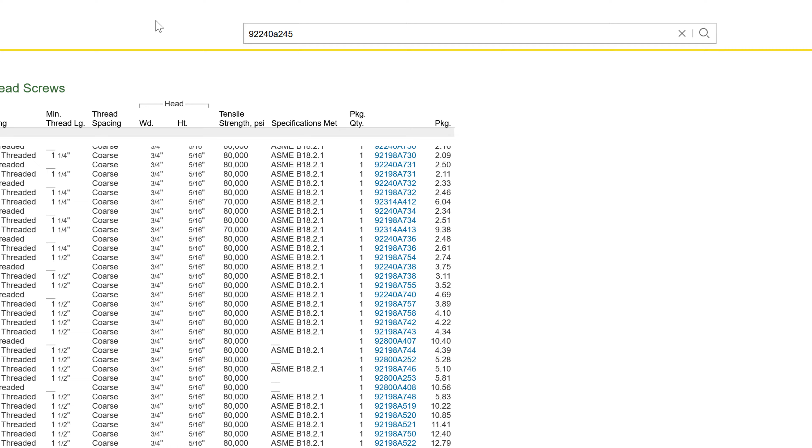I'll go with part number 92240A245. And here it finds us our bolt, so I'll go to this product detail here. And of course it gives us a lot of specifications about the bolt. We can drop down and see the formats that we can bring in. We have IGES, 3D PDF, SAT, SOLIDWORKS, and STEP with no threads.

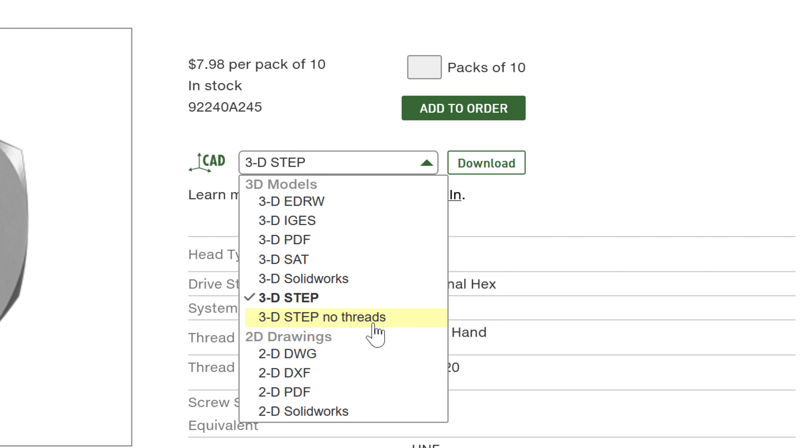We can import actually the IGES, SAT, SOLIDWORKS, and STEP with no threads all into Alibre. And I actually think SAT is probably the best choice in most cases, even though STEP will be the most common. Let's give an SAT file a try on this one, so I'll click Download.

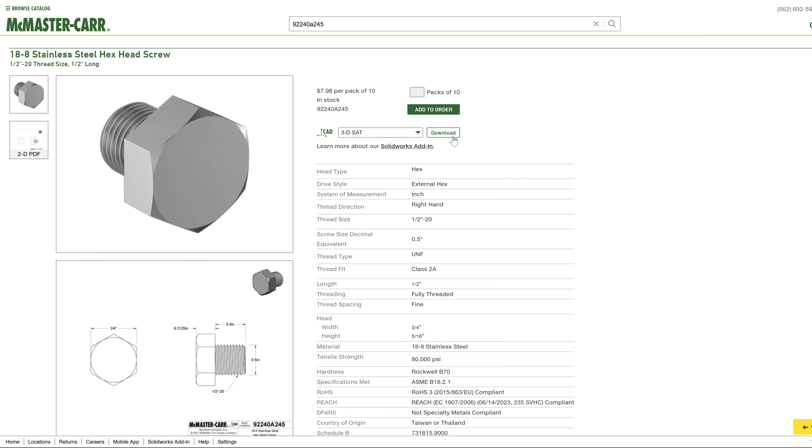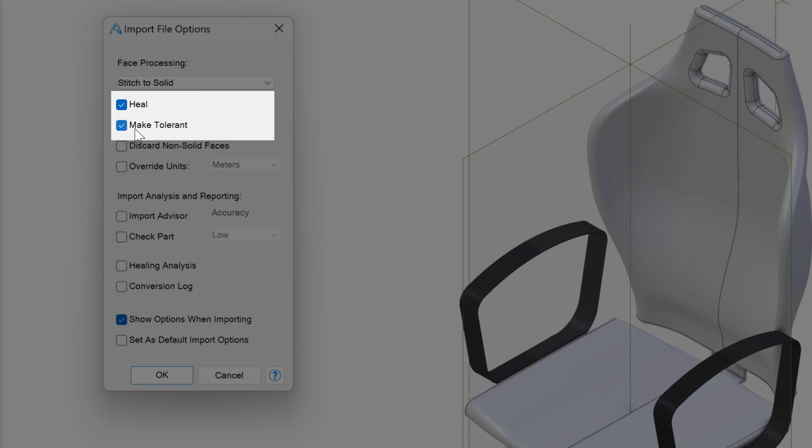So returning to my office chair model, I want to import the design that I just downloaded. So I'm going to click on Insert Design, and I can select the model that I have just saved. When we do, an Import File Options menu comes up. I always recommend Stitch to Solid and Heal and Make Tolerant as best practices for importing other formats. This is again in the SAT format. So with these two options selected, I will click OK.

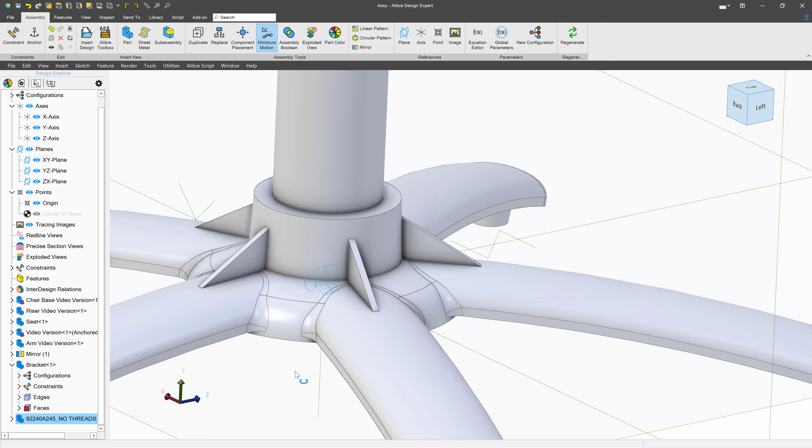And here, if I highlight in my tree, I can see that the part was imported right on the origin and is currently sitting right in the middle of my part. So what I'll do is I'll choose Component Placement right here. I'll go with Precise Placement, and I want to move it down the y-axis, say distance of 10, and I'll go to Selected Components and choose my bolt, and we'll apply that. So now we're able to move it out of the way, and that's our bolt.

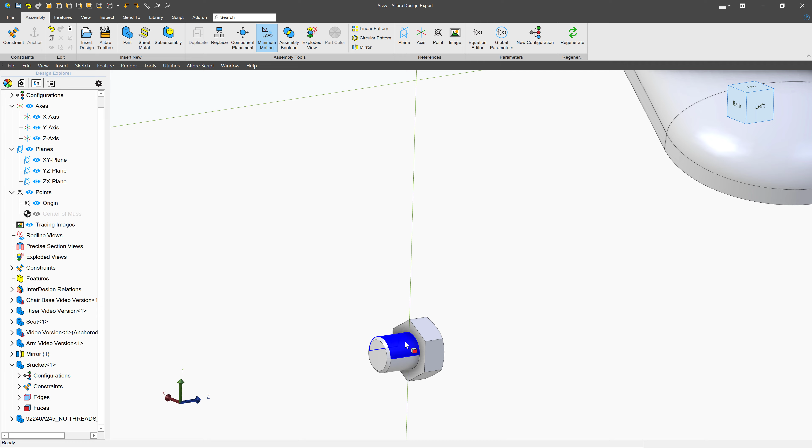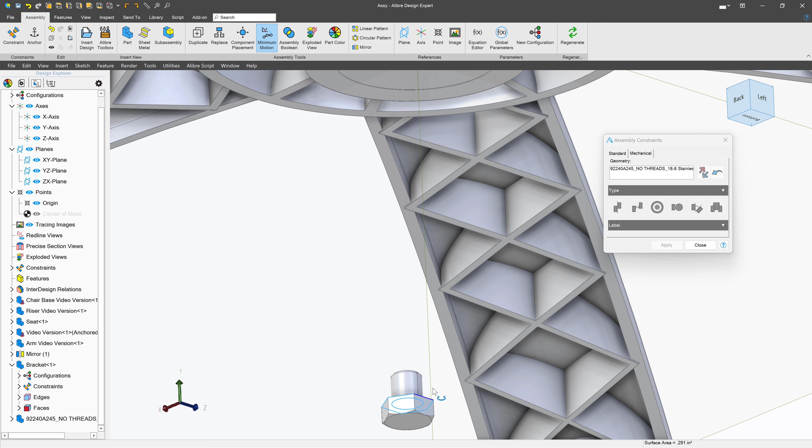And now with this bolt, we can add a mate and say I would like to highlight this face and align it with, say, this hole. We can apply. I'll take this face and align it with this surface so we can see how the bolt goes right in. Now you may want to, if you're detail oriented, add washers or anything else that your assembly may need.

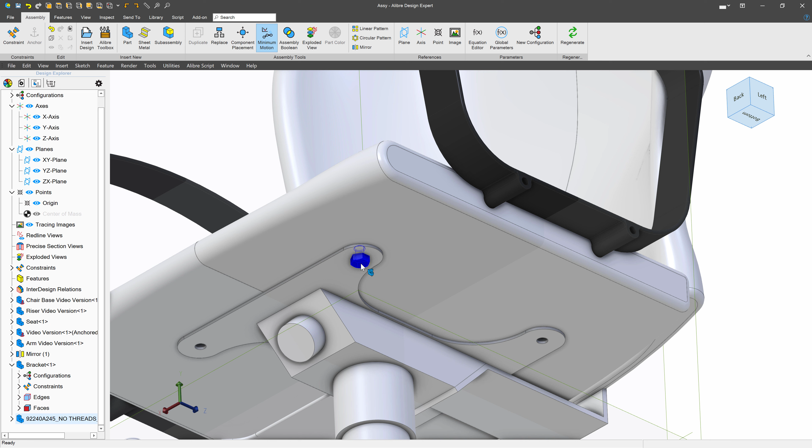So do I have to go through that whole process of re-importing a part when I'm all done? No, if I want to have more than one, I also have the option to hold the Control key, click on my bolt, and hold my left mouse button down and drag it. Then I let my mouse button up, and then I let go of Control. And so I can duplicate parts quite easily with this method. So I can say I want to be aligned there and apply. I can say I want this face to be aligned with this face, and so on.

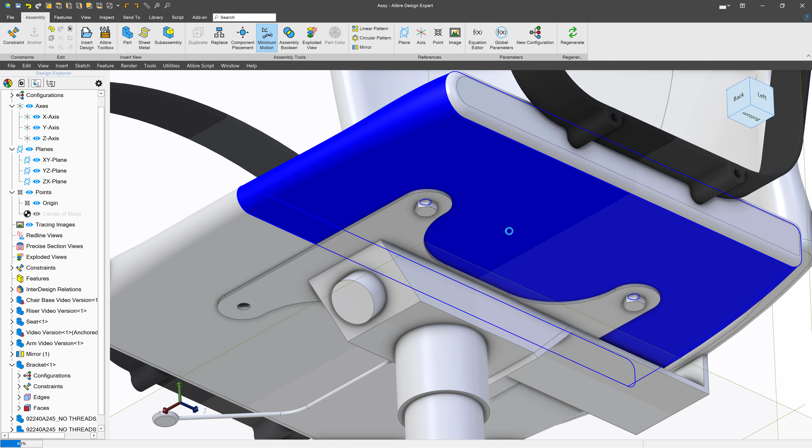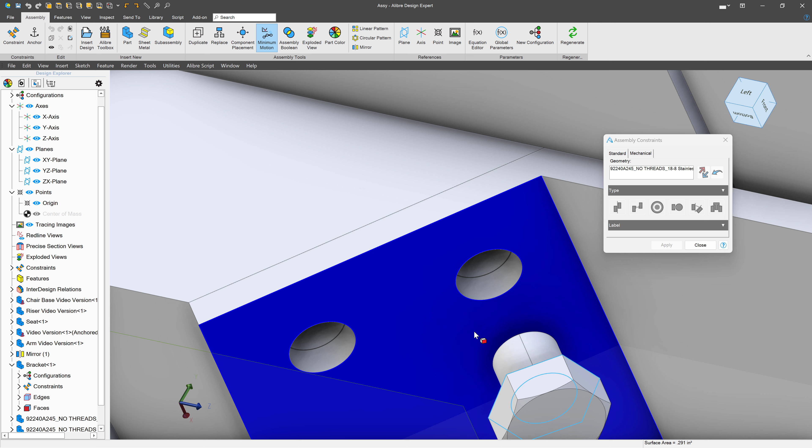I also, like we've done in a previous video, can mirror components. So before I do so, I'll just focus on populating some of these holes as well. Constraint, concentric, apply. We'll choose this face for the bolt to go in there and apply. Same thing, just by holding Control, I can duplicate that part. We'll make sure that we're concentric there and there. Apply.

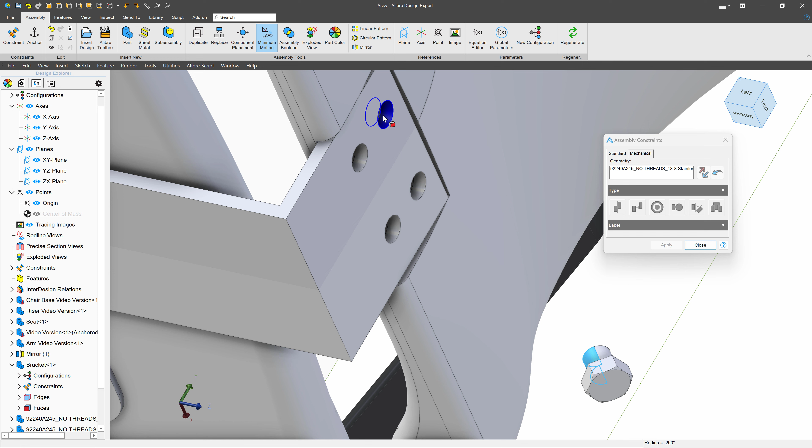Again, put a bolt in there, apply, make sure the bolt is sitting flush, apply, from there to there, apply, apply.

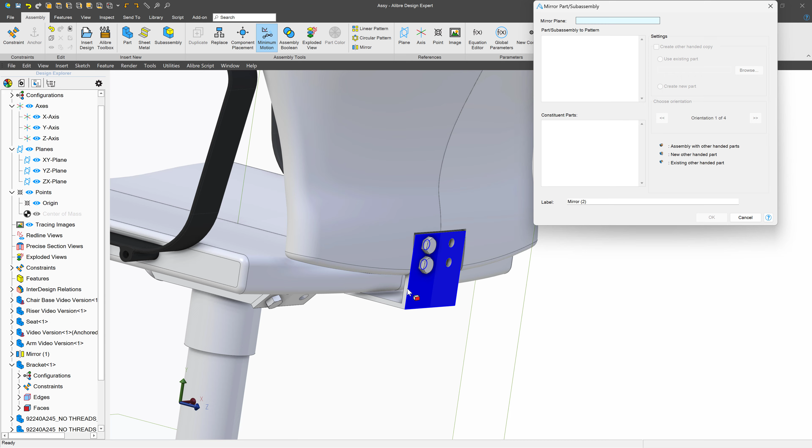Now I can choose mirror if I want to save a little bit of time, and I can choose my central mirroring plane. And I can choose this part, but there's a problem. I get this unsaved parts dialog. And so the solution is to save the assembly.

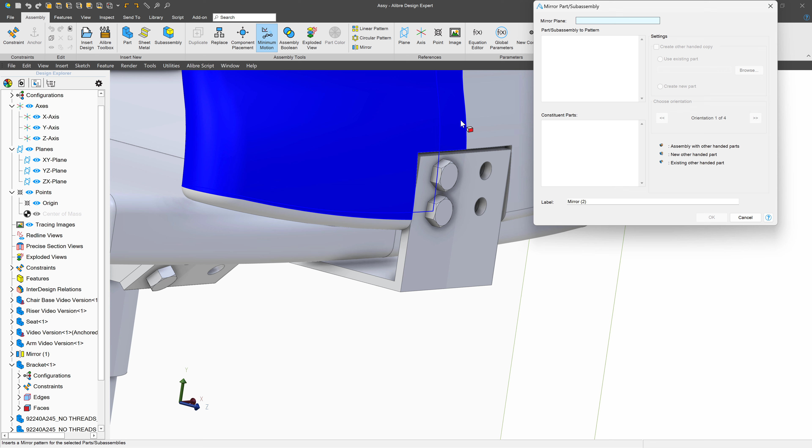And now if I go to mirror, I can select my mirror plane once again, my parts to mirror, and there we go. So that's one contingency with mirroring parts. We just want to have all the documents saved. And then I'll also include these bolts over here. So we are assembled there.

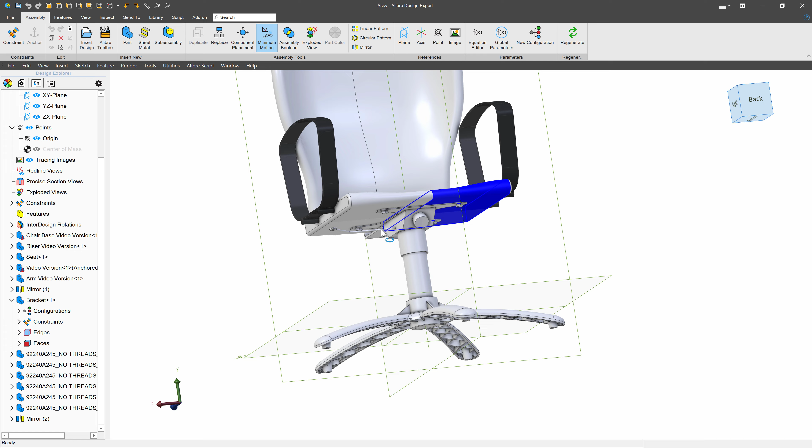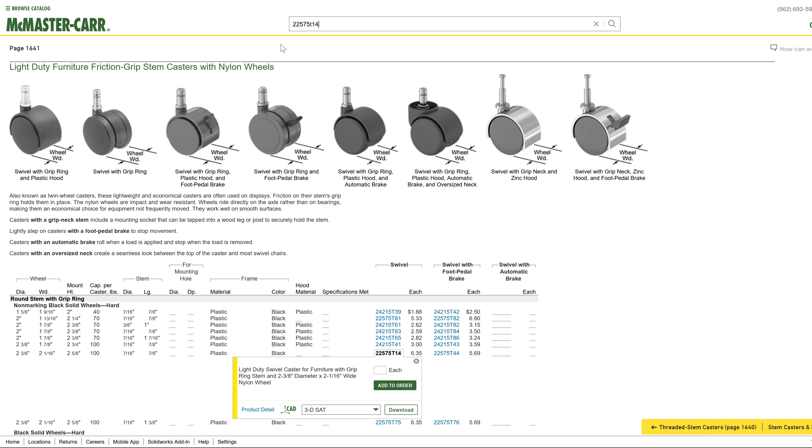Let's also talk about office chair wheels. If I go back to McMaster-Carr now, I'll say maybe I want an office chair wheel, number 22575T14. And there's my caster wheel. That might be a great fit. And we did an SAT last time. Let's go with a STEP file this time and download.

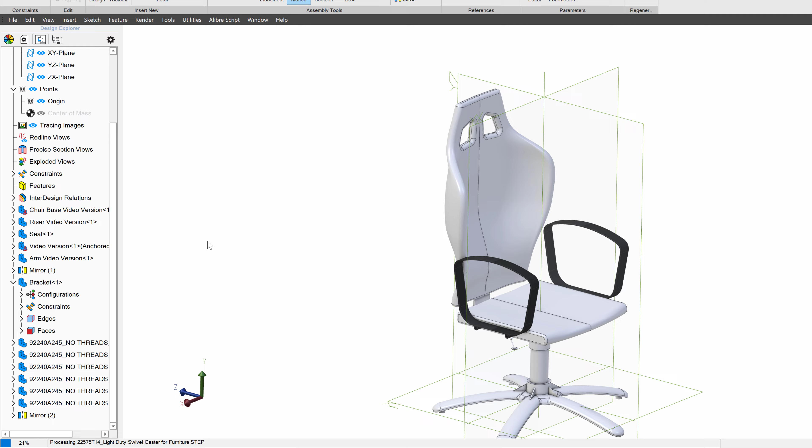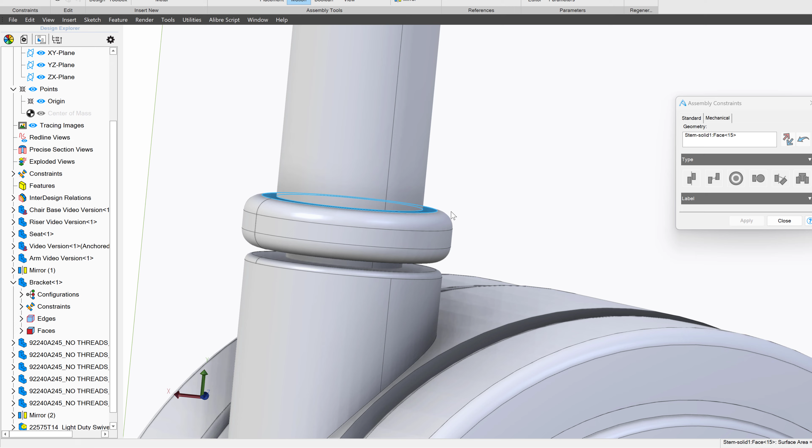Going back to the assembly, I can insert my design. And like the SAT file, as before, we can heal and make tolerant and say OK. And as before, I think our wheel has shown up right in the middle of our part, but we can drag this down. So I can add a constraint here and here and apply that. And I can say that this face, maybe one to stop it here, just like that, and close.

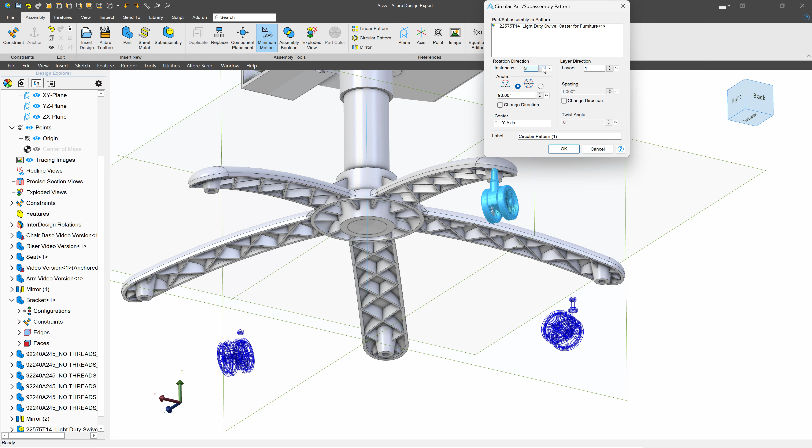Next, as before, we did some mirroring, but let's do a circular pattern now. And of course, we can pattern these entire components. I select the component to pattern, and then I choose a center axis. This one will do. I can say I want 5 instances, but of course it doesn't line up with our 5 chair arms because, just like in a feature pattern, we'll want to specify evenly spaced here. And then we'll say OK. And we have chair wheels for the office chair.

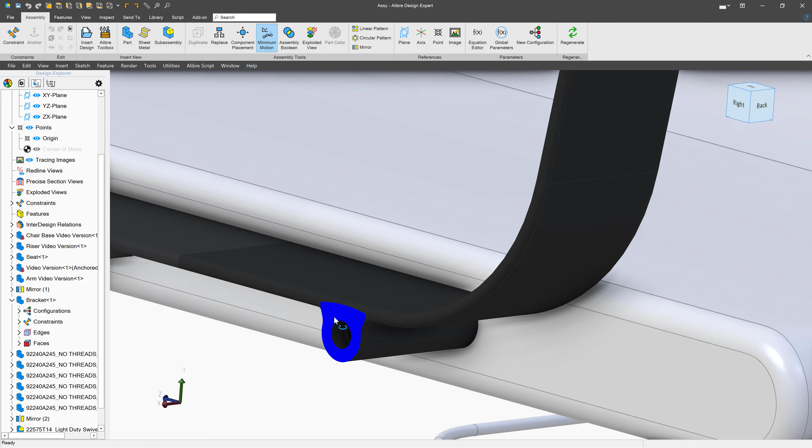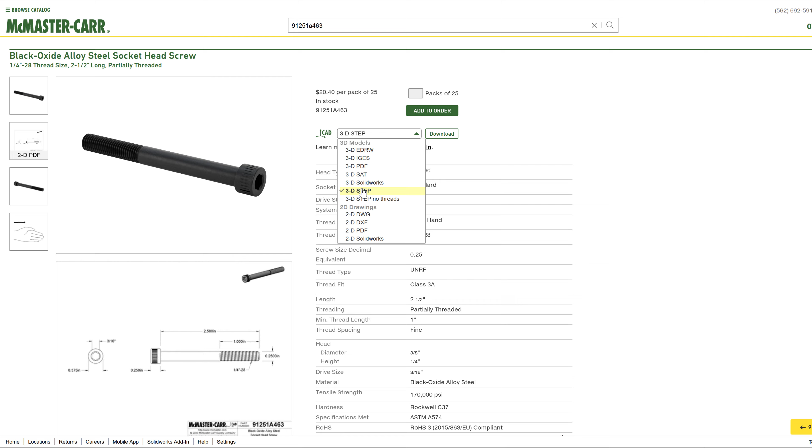Lastly, we can go to McMaster-Carr and hunt down the right bolt here. I think McMaster part number 91251A463 would be a great bolt for that. And back to product detail. We've done an SAT, we've done a STEP. I'll do a SolidWorks file. Returning to the model, let's add that bolt.

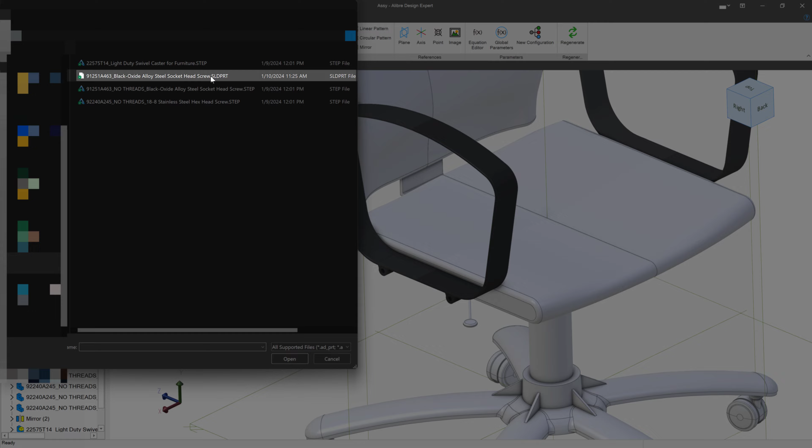So I'm going to go with Insert Design, and you'll see only STEP files are showing up. Where was that SolidWorks part file that we wanted to save? Well, let's cancel. Let's go to File, Open, and here in the same menu, here's our SolidWorks part file that we've downloaded. So it's important to say when we import into assemblies, a SolidWorks part file will not directly import into an assembly, so instead we'll open it as a part, we'll save it,

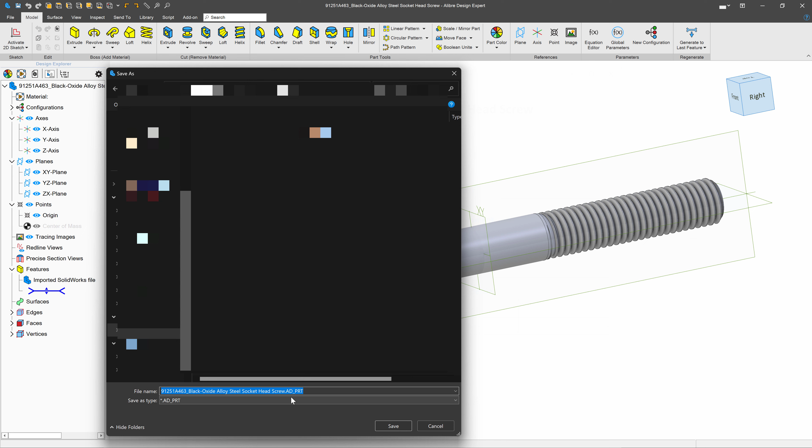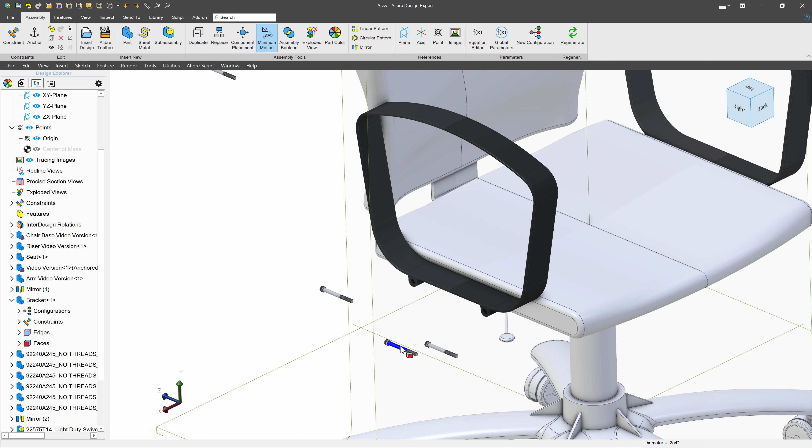and notice the save format for the SolidWorks part now is the Alibre file format. And so we save that, we go back to our assembly, and there's our Alibre part that we can import. So a little conversion may be necessary. I'll actually get rid of 2 of my bolts.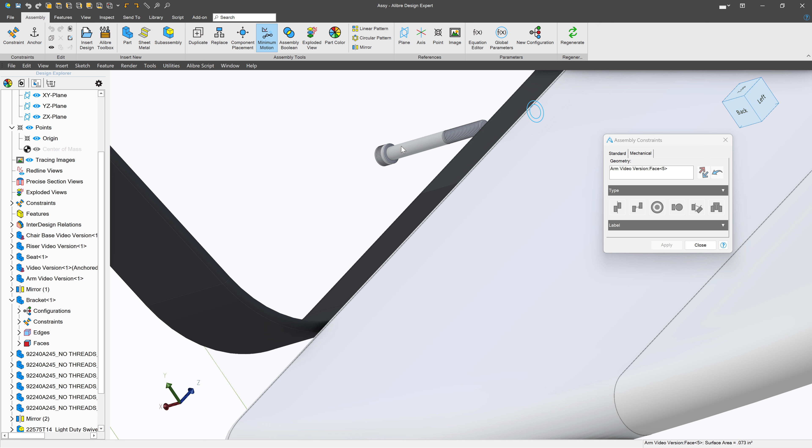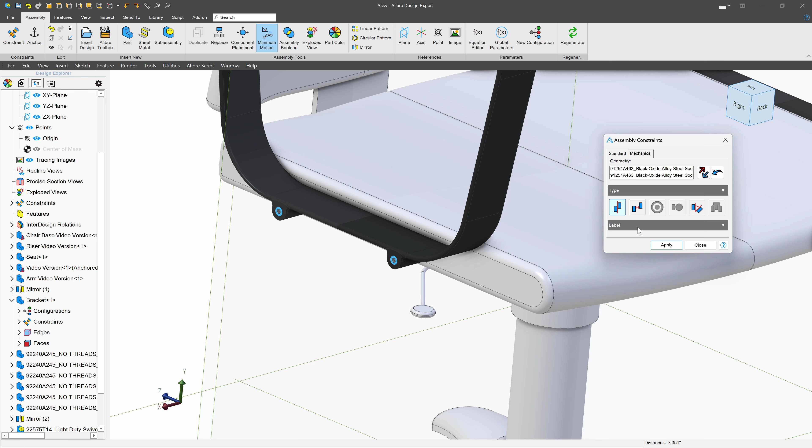And we'll go with constraint. We'll select this face. And of course, we need to flip this around the other direction. Just like that. We'll apply that. We'll have this face and this face be coincident. And apply that. Then I can do the same here. I can have this face and this face be coincident. And lastly, mirror.

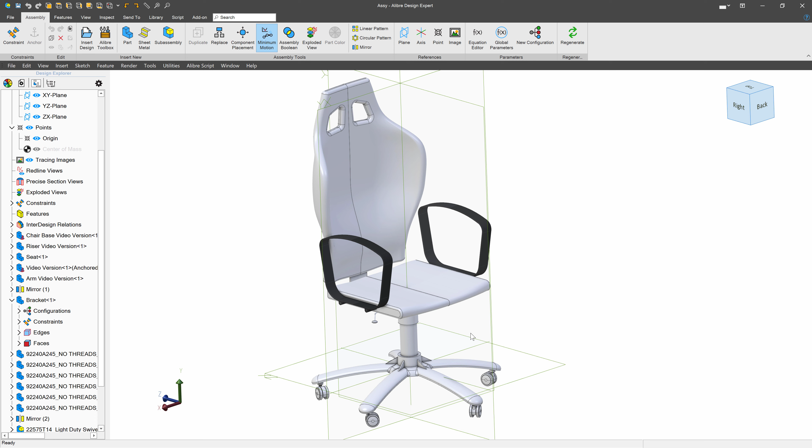Just like that, we were able to complete our seat assembly. Just as we've imported bolts that don't have threads to reduce the complexity, several things in this assembly have also been omitted to reduce complexity. This is an invitation for you to use the skills you've learned thus far to make an even better chair model than we've made on your own. And that's how we implement STEP files in the assembly.